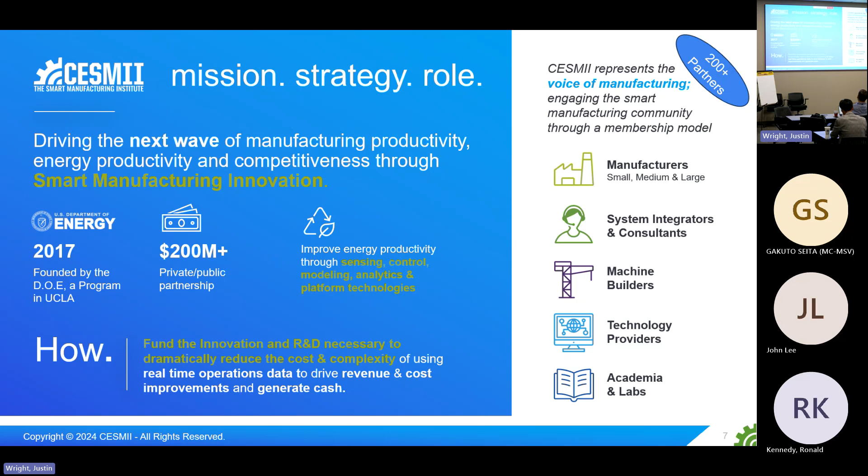One of the things that I like to show, just to set the stage, is that the work of the institute is based on how we articulate what smart manufacturing is. If you look at this particular diagram, the first step that we need to take is to actually have the manufacturing process connected so that you can actually get the data in the first place.

That's step number zero almost. And then once you've done that, that data needs to be contextualized. This morning, as Jonathan and team were talking about how to structure the data and make it available to all the parts of the system that need to use it for value generation, that doesn't happen without setting the context. That's about the platform technologies that we talked about in the morning.

Once you have that converted into actionable information, then you can take that and feed it back into your control system as is, or you can do some analytics and figure out, hey, I know what's going on, I know why it's going on. Now I have to start predicting when it's going to happen next. So this is all about the predictive area.

Between the analytics and the predictive modeling side, you develop some insights and then make that intelligence available for your control system. Back in the 60s and 70s, we talked about model-based control, and some of you may be familiar with that. But that's one form of this diagram. That doesn't happen without actually getting these other portions into the system.

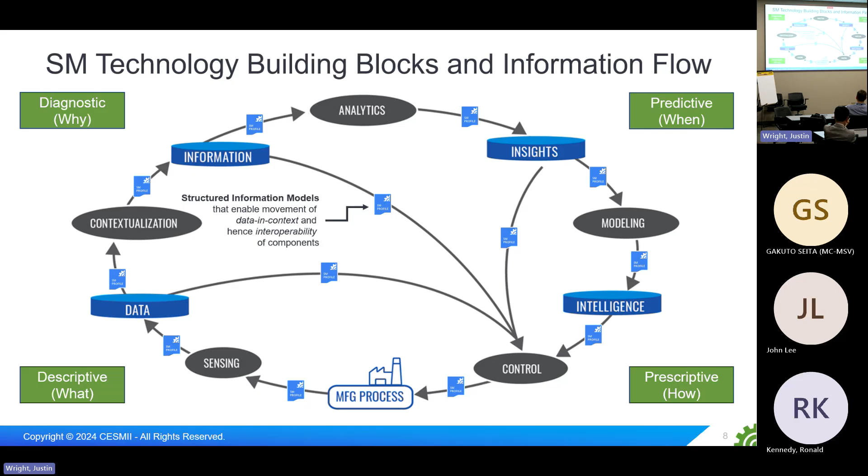So in 2017, we developed a roadmap, and this was established for every institute. This is a requirement, and we had about 100 plus people that helped develop the roadmap. They came from academia, they came from industry, they came from government, and we developed 4 pillars. We're calling them pillars, but really they're 4 blocks here.

The 2 of them on the right-hand side are technologies, so these are all enabling technologies. If you said that, hey, for me to operate my process in a smart fashion, I need a sensor that works in very harsh environments—that's a common problem for many industry verticals, and that becomes a problem that we solve. So that's one example of what an enabling technology is.

It could be a predictive model as well. The second piece is around the information flow. This is all about the platform, and you'll hear more about it tomorrow—you heard some in the morning. But how does the information move through your system so that it becomes smarter? The third piece is around education.

So again, this is not just about the talent pipeline, but it's also the education and training for the workforce that's already out there in the ecosystem. And the last one is ecosystem integration. This is where we bring together our members, solve the problems, and then have our smart manufacturing innovation centers around the country that can take the information and technology and disseminate it through the regional networks.

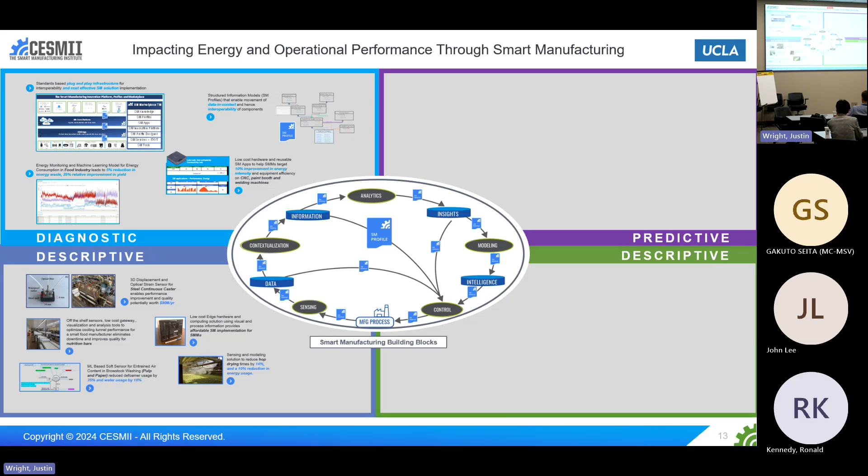So if you look at the bottom left here, this is all about the projects that dealt with things like sensing and data acquisition, and to some extent contextualization. These are the projects that dealt with the development of the platform, and then some examples of projects that utilize the platform to show the strength of how data can be contextualized and used for value. So those are the two examples there.

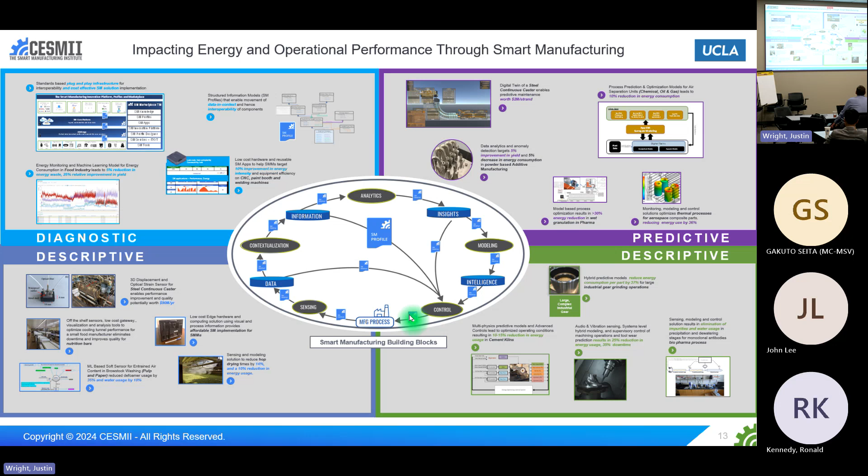On the right-hand side, we have some examples of how predictive models were used, whether they were data-driven machine learning models or physics-based models, and how they impacted the operation. And then the bottom right is where we close the loop, here's some examples where you can actually influence how you're controlling the process.

So that was about closing the loop. And if you look at the type of industries that we impacted on those projects, these are just a cross section of examples, anywhere from paper, steel, food, chemicals, thermal, cement, aerospace. These are some examples. So this was a small cross section of those projects.

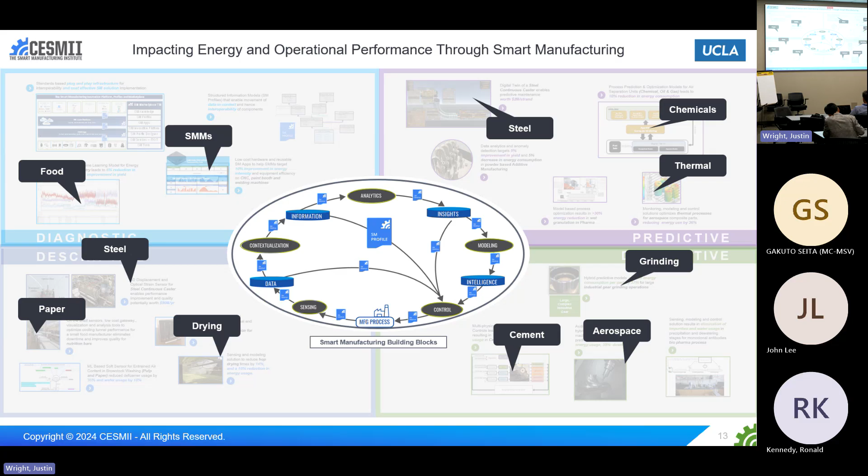One last thing I'll say about the portfolio is that our goal is not just to look at the roadmap and launch some of these project types and get the results and outcomes, but it becomes exponentially more valuable if these outcomes can be converted into things that can be accessed by our members and the ecosystem. So we have a deliberate task of taking the outcomes, packaging them for use in the marketplace for the platform, or if it's an education project, taking that and making it part of the knowledge base and the education and training portfolio that we have in the Institute. And that's how the project participants, the industry, and the CESMII members can benefit from this.

Now, this is not easy to do. There are many technologies that we work with where they are not easy to package for this purpose. In other cases, it's easier to package for those purposes.

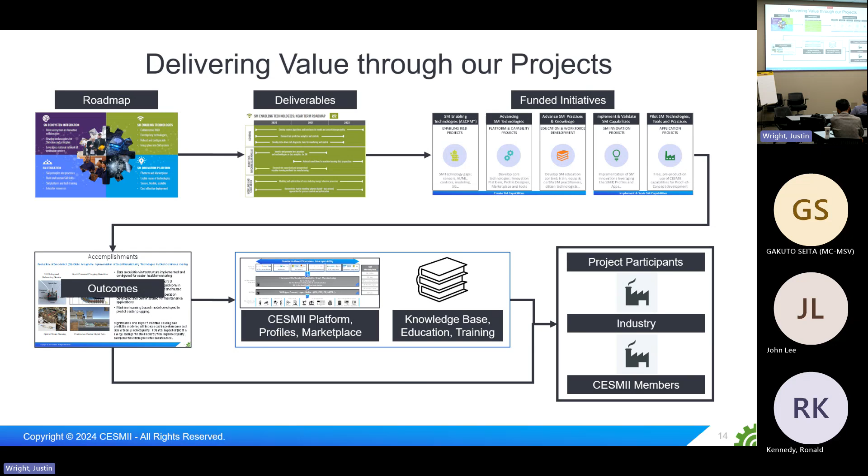So with that, I have three. I think the first one we have Sudhi, if you're here. Okay, so you can cover his and yours. Oh, okay. All right, so we have Rob Shantala, who's going to talk about two of those projects. Yeah, okay, you just realized, do I need a microphone?

Thanks, hello everybody. So this was really interesting. FullBore, which is Sudhi's company, he'll be there this evening if you haven't met him already. So Sudhi's background, he was at Stanley Black & Decker and was leading digitization efforts there for their manufacturing. And he took some of the capabilities and things that they learned that worked well, and turned it into some applications that can really help.

So this particular project was done in collaboration with CCAT, I think, as well, up in Connecticut. And the intent was to bring a very simple application to the factory floor for manual assembly. It was with PTA Plastics, a plastic injection molding manufacturer. They have two factories, one in Connecticut, one in Colorado, and this is at the Connecticut facility. This first project was focused on a manual assembly line. If you were in my session this morning, I showed a little overview of the line.

And the architecture is kind of interesting. So Win the Hour is the name of the application from FullBore, and that runs in an Azure container with their app. It talks to the SMIP, the Smart Manufacturing Interoperability Platform. In this case, the data that was driving the analytics was based on a camera system, but it kind of isolates, it doesn't care what it's based on per se. For example, we've got it running in a lab up at RPI in one of the Smart Manufacturing Innovation Centers where the data source is a CNC machine. So it kind of abstracts how am I counting parts, where would I get the source of output.

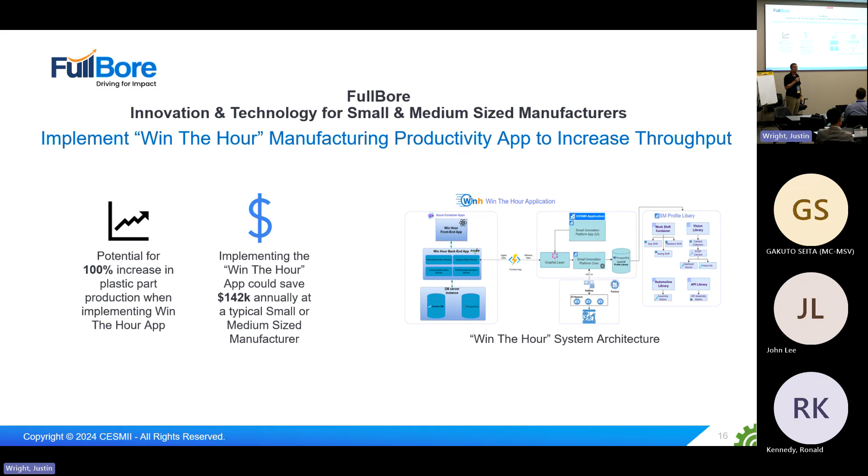Other questions? No? Okay, I'll stop channeling Sudhi. I don't know who's next.

I'll go, so this is mine. We did this one - this was from a previous round of grants, I think. So the focus here was for CNC machining and building a profile. There's been a bunch of work going on creating profiles for CNC machining. This is with a small manufacturer - two projects focused on small and mediums, as opposed to the big folks doing industry-specific research, like reducing the energy to make cement. That's pretty complicated. The other end of the spectrum is easy, simple to use solutions for the small and mediums. So there were two things.

The customer was looking at trying to manage their work through the floor. At South Bay Solutions, they're pretty much a job shop. They do some high-runner stuff automated with robots for some parts for an automotive manufacturer, but most of their market - they're out in the Bay Area, California - are semiconductor equipment manufacturers and medical device manufacturers. So there's kind of lumpy demand coming through, and they do a lot of custom work. Part of the problem was they wanted to shift their management strategy for the floor, using Scrum, if people are familiar with software development, and try to think about all these queues of things moving through the floor for CNC machining.

So we used cameras for this, and I used cameras for this. We had some data connected by sensors, but most of it was driving off vision. We were trying to keep track of which mills were available to get work, so they could make sure they knew when there was somewhere to send it in real time - which mills were running, operating, and how much were they producing. So, little simple Pareto charts of cutting, not cutting, idle, being loaded, unloaded, et cetera.

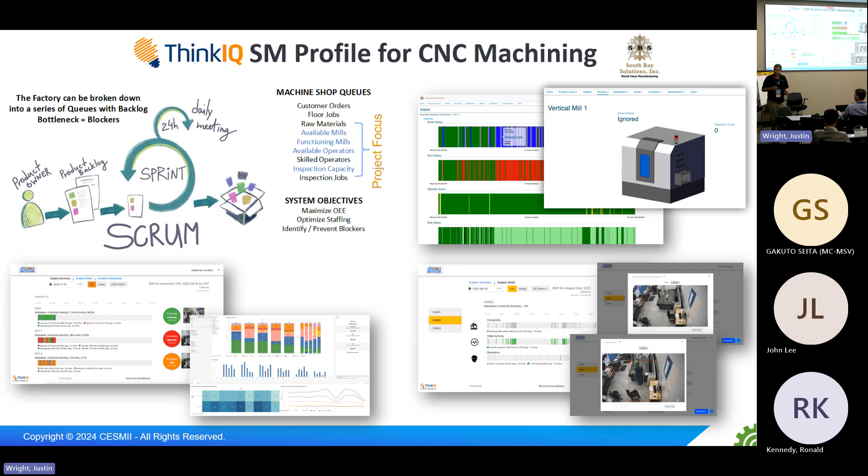Okay, and then we've got the profiles available in the library. Excellent. So this is one of the projects that was, I think, one of the feeders to what was shown this morning by Jonathan and team. Very good. Okay, and we have Yubin.

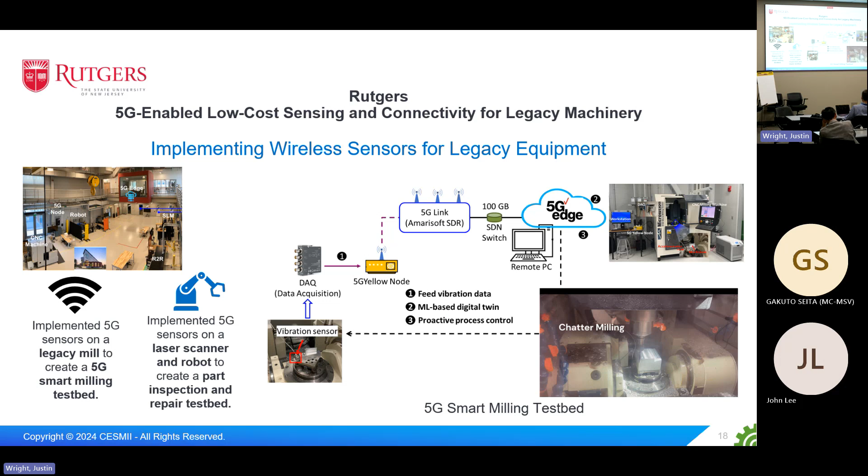I'll go through some other examples from our portfolio, and depending on time, we'll spend the appropriate level of detail on it.

This is another partner, a 5G technology company different from what he talked about, but they've been very strong partners with us along this journey. This is a story about a small manufacturer, Wipro Manufacturing in Pennsylvania, where the idea was how to quickly get them capable of acquiring data and displaying it, dashboarding it, and then using that to improve their operations.

It's a standard story for any small manufacturer. In this case, they had low-cost solutions for getting data from machinery, and implemented not just the connectivity part through an edge device, but also multiple applications that sit on top of that connectivity layer.

They were able to demonstrate roughly a 10% improvement in their productivity, and then roughly about $60K a year. Small number, but for a small manufacturer, those are big things. This was implemented in only a small part of the facility, and they are expecting that the same type of solution would be useful for the rest of their facility.

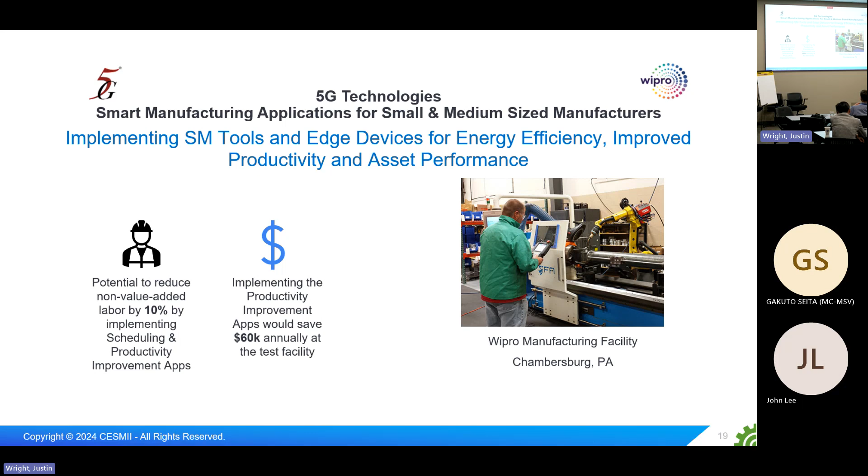Some other examples here, transitioning from small manufacturing to the process industry. University of Louisville worked with what was then called Argos Cement, now Summit Materials. If you're familiar with the cement production process, about 60% of the energy is actually spent on the kilns. This is where the clinker is made, which is the main step in cement production.

This is a piece of equipment like a rotating kiln, about 120 feet long, maybe 4 to 5 feet in diameter, typically not very well instrumented. They worked together with Argos and came up with a complete solution—the diagram I was showing where you have sensing, analytics, predictive modeling, and control. They completed the whole loop and presented the solution to Argos.

They ran that solution and demonstrated it on one facility. Now Argos is actually taking that and moving over to multiple locations. Here again, it was 8% savings in energy, and for that operation, 8% is huge. One of my PMO teams calculated that this would power about 973 American homes, and financially it's about 1.6 million annually for them. This is an example of a process industry, energy intensive application for smart manufacturing.

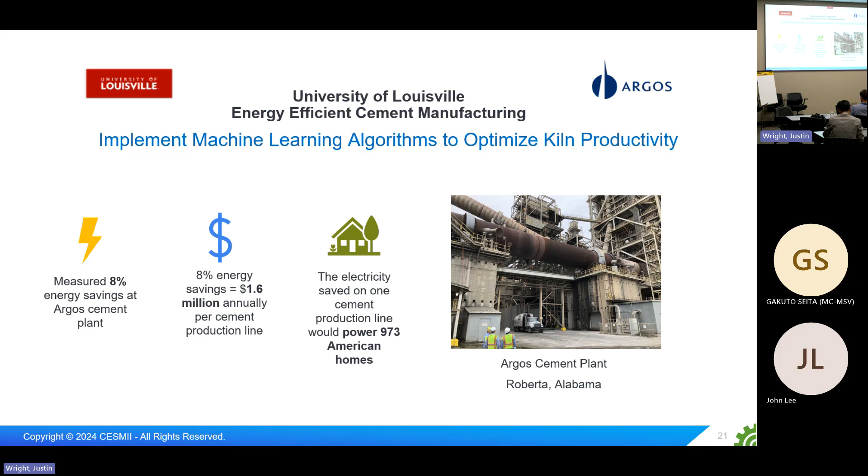Auburn University worked with one of the pulp and paper manufacturers, Rayonier, to solve a problem where they didn't have an in situ measurement for measuring how much air is entrained in the pulp. So what they did is come back and say, okay, we could use a pseudo sensor, based on process signals and some machine learning algorithms, to estimate what would be measured if you actually had a measurement in place.

That solution demonstrated that if you knew how to estimate the air entrainment in the pulp, you could actually reduce 35% of defoamer usage. So this is again more of a sustainability impact, where you're reducing the usage of materials.

Savings over 13.7 thousand gallons per washer in this washing process of the pulp. This would be an equivalent of about 46 American homes that you would supply water to.

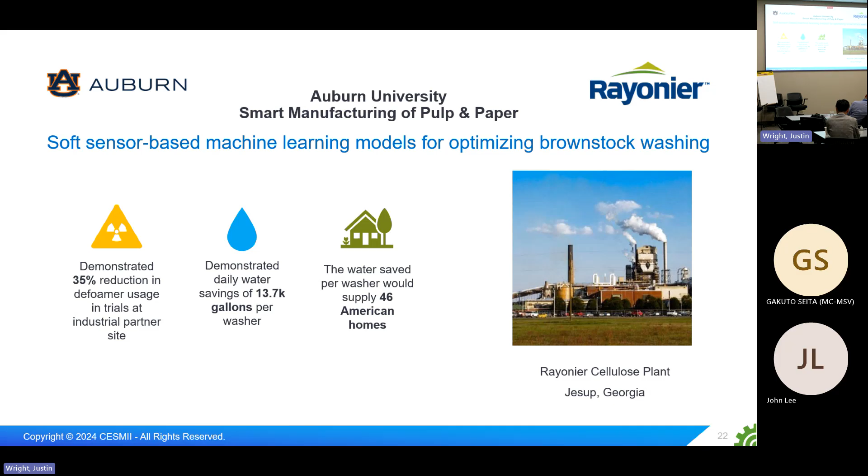So again, we're trying to come up with different ways where a sensor is not available, but because of the modern ways in which we can take process signals and do some machine learning on it, you can predict the entity that's of interest. This team is now working with 2 other manufacturers to take the same solution and deploy it at their facilities.

This goes to the other extreme, the third extreme, I guess. This is where we are talking about a very fundamental problem in what's known as vacuum arc remelting. In that process, this is a titanium product. In order to get the purity required for aerospace applications, they have to melt and remelt this material 3 times, and it's very, very energy intensive. So if you cut down one step, that's roughly 33% impact on energy.

But the thing they wanted to try here was a method that uses ultrasonic vibrations during that remelting process. And if you prove that works, and if you actually implement that in the actual vacuum arc processes, you'll end up saving 30% in energy there. Vacuum arc remelting is a very popular process in titanium, and that's a huge impact if you were to implement those solutions into these facilities.

So here again, Raytheon was our partner, and they've basically proven this to the step where now that solution can be taken and implemented, or demonstrated, in an industrial facility.

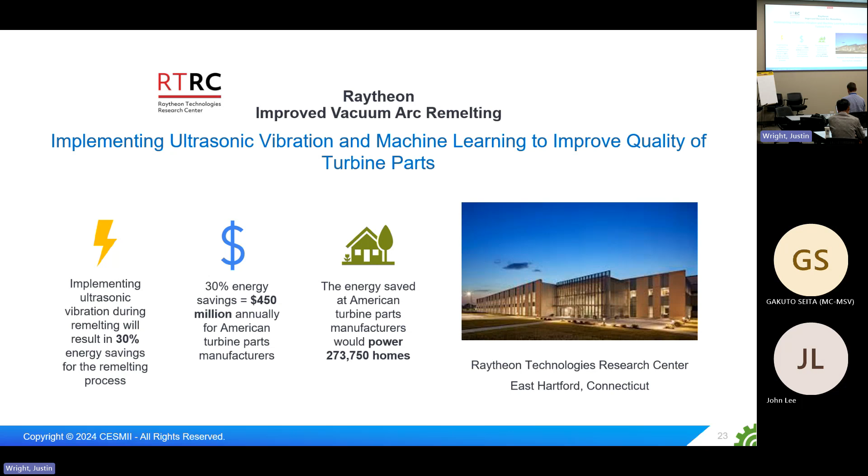This is a project where we talked about a different industry vertical - this is the food industry. This is actually one of our first projects, and General Mills was the company, with ThinkIQ again our partner on the platform side, who actually implemented this solution to make things very visible for the entire manufacturing process supply chain. The idea was to make data available, make the dashboarding visible, and then make an assessment of where the energy savings potential is.

And then for management to go back in and say, okay, now we're taking this area, these particular sectors in our manufacturing process, to go after. So again, they've done this at 2 different plants, and a 2% energy savings translates into about $500,000 just for that particular facility.

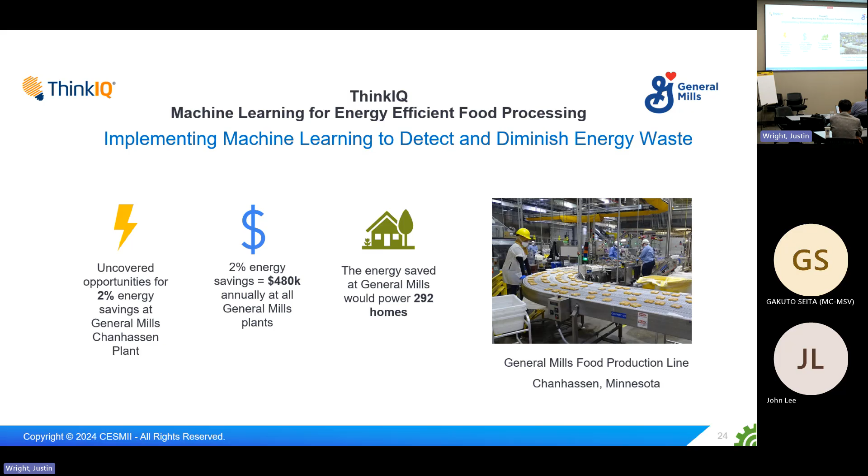Here's an example of a small, medium case, and again it's not manufacturing per se, but it's in what I would consider to be in agriculture.

I don't drink, so I don't know all the details. We have somebody in the room who actually does this as a hobby - you can ask him those questions.

But hop drying is, again, a very, very old process. There's not a whole bunch of technology that goes into it. What the hop dryers typically do is have these curves that are developed so that for this much of a hop layer in your furnace, you just set it at this particular temperature, run it for X number of hours, and you'll be ready. It's based on some past experience, past data, right?

But it's never optimized. So this team went in and used simple sensors - thermocouples implemented in key locations. They used some machine learning algorithms and came up with a predictive model, and said that here's how you can optimize the drying process and cut down X number of hours from the drying process. So again, you're impacting operations in terms of timing, and you're also impacting the energy consumption in the hopping process.

I think they worked with 5 different hop dryers in the Pacific Northwest, and here's an example of how they were able to save about 10% in energy. So this is a picture of one particular farm.

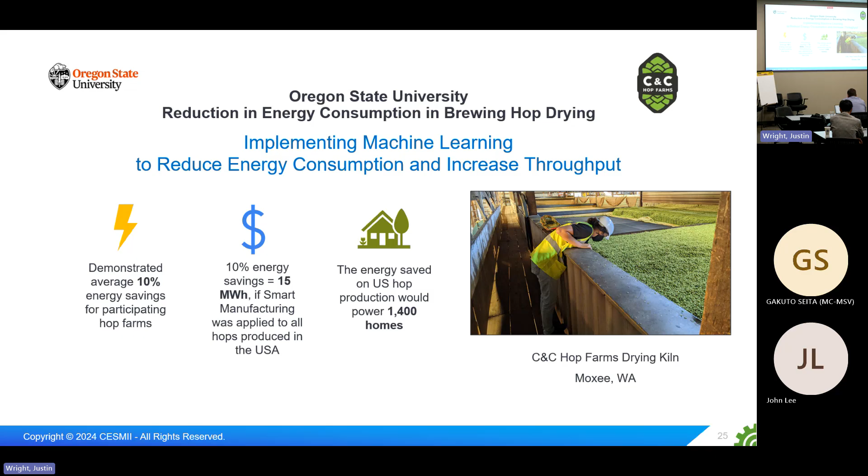This is another industry sector where we looked at pharmaceutical production and utilized some of the smart technologies, both in terms of measurements, or in situ measurements, as well as some advanced techniques through machine learning and predictive modeling.

It's an area that is regulated, right? This is a very regulated industry, so we have to be careful about how these solutions can be implemented without disrupting the normal process of regulations and certifications and so on.

So they've been able to demonstrate some smart technologies here to change the throughput of a new process in pharmaceutical production. The tools demonstrated a 50% cost reduction in that new process. Now this was done at a lab scale, so again I'm giving you a cross section of different types of projects we've done. In this case it was a lab scale project with an industry partner, and the next step is to take it over to the next TRL so it can be demonstrated at a real industrial facility.

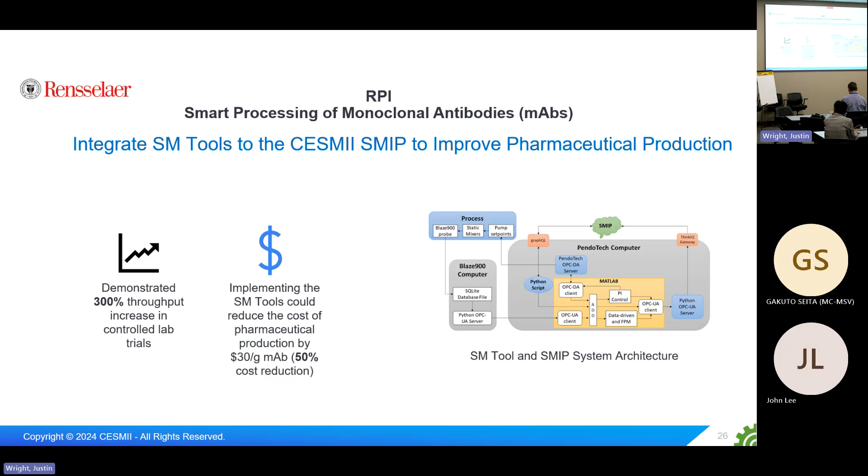Going over to the workforce development side, just one example - Conrad does a fantastic job highlighting some of the work going on in workforce education. But in this case, this was also one of our very first projects. MIT and Penn State had worked on developing a bench scale plastic fiber extrusion device that was used specifically to develop software that can be integrated into their curriculum for teaching students. This is a 4-year program that they had.

They brought this device up, asked the students to work on it. They went through the sensing part, the predictive modeling part, developed the software that goes along with that device, connected it to our platform, the whole bit, and then used that entire package to come up with an education curriculum that has now been used for about 4 semesters at Penn State.

So this is a joint effort between Penn State and MIT to create this. Penn State was responsible for this, and the CESMII team, of course, was partnering with them. These educational modules now become certified, CESMII certified modules that Penn State is able to use semester after semester.

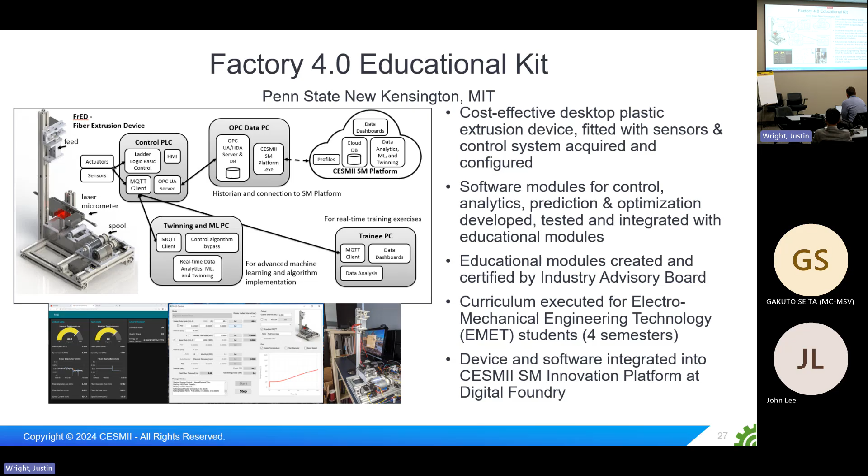This is actually a great story - a small manufacturer in upstate New York. They make nutrition bars, and what they were finding is - and I love this picture here - this is what they don't want, right? If I remember correctly, don't quote me on this, I think it was roughly about 30% of their product was showing that behavior. That's not good for a small manufacturer.

Again, a very simple technique here. All they had to do was make them understand that if they were monitoring their process, if they were installing temperature sensors in the right place, they could actually figure out what's going on in the cooling tunnel. The cooling tunnel is the one major step in the process here. So if you see this picture right here, that's the cooling tunnel. Just instrumenting it with temperature and humidity sensors, providing a simple dashboard with a MATLAB-based predictive model to make some decisions, and then integrating that with our platform.

They were able to completely eliminate the downtime, which is a big deal for them. They changed the operating set points of the cooling tunnel, increasing productivity by 6%. They have a compressor in the cooling tunnel that was cycling like crazy, and they couldn't understand why. It was just trying to keep up the temperature, but the temperature was being measured in the wrong spot, right? So it's one of those things - you have to change the thinking, and make them aware of simple things like, if you position sensors in the right location and control off of that, it makes a lot more sense. Again, a great story here.

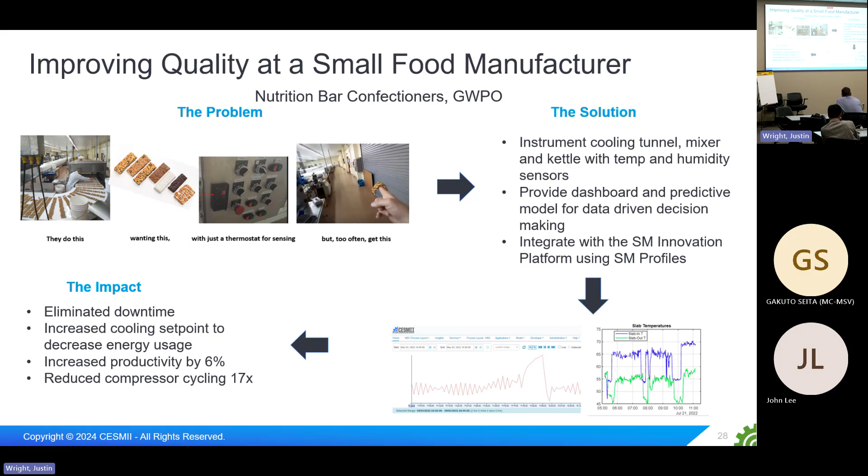I'm going to give you a couple more examples, and then I want to open it up to questions - I don't want to keep talking here. This is the steel story. We had a great set of partners here that went after several aspects of the steel making process.

If you're familiar with steel making, a continuous casting process in steel is used by the majority of manufacturers to make steel slabs. One problem was to detect exactly where the solidification occurs in this stream. Here's the molten metal - it comes out as a slab at the other end. But if you are able to detect where exactly the metal changes from liquid to solid, you can control the quality of that slab very easily. So the problem was how do you install sensors in that kind of environment? Missouri Science and Technology came up with a 3D sensor that could be mounted on one of these segments, and an optical strain sensing device that worked in that environment.

So that would be able to give them the data necessary to figure out where this was happening. Purdue created a continuous caster digital twin, so they could tie that up and provide a tool to their engineers on the floor that could use this knowledge for maintenance and other cases. Again, this is huge. If you do this right and have it implemented, it's got huge potential for the steel industry as a smart manufacturing solution.

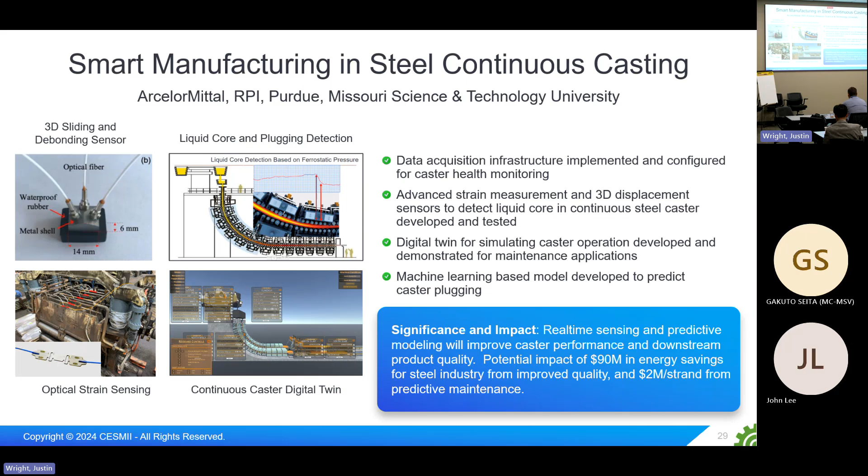I'll skip over the next few, you'll have access to some of these things through our website as well. My PMO team isn't here, but I asked them to put together some things that we learned from this whole experience of running 60 different projects, cross-cutting 15 different verticals and small, medium, large manufacturers.

As an institute, we have to be aware that we are bound by certain processes. We are a public-private institute. We have to be aware of the process that we need to follow as a taxpayer-funded entity. We found that the process timeline from proposal to kickoff needs to be streamlined. A lot of our small partners found it very difficult to follow that, and we have to be better at doing this. From the time you make a proposal to us to the time we kick off, we have to shrink that cycle significantly. That was one of our learnings.

Small manufacturers need help in proposal writing and contracting. Large companies typically have teams within their organizations that can deal with government funding and contracting, they have internal capacity to do that. Small manufacturers don't. So one of the ideas was that small manufacturers could work with larger manufacturers as a team and then solve similar problems, but have the large manufacturer take on the responsibility of governing the process, which may work. If not, then we also have to be aware of what we can do as an institute.